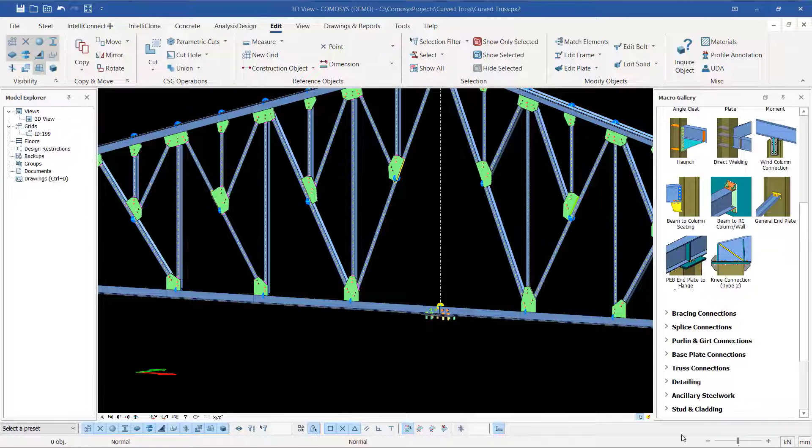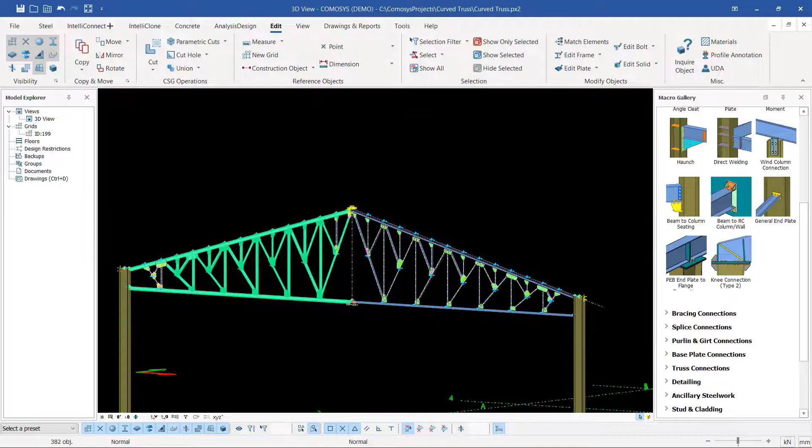Today I'm going to show you how we can create further connections on this particular truss. I'll pick the apex here and show you how we can create a connection, because, as I told you, this will be two assemblies of truss. This will be one assembly, and this will be a second assembly. So this will be carried to site as an assembly, and this one also. But all the assemblies will be assembled at the workshop. So once welded at the workshop, they will be lifted or shipped to site.

Now let me show you how we can create some simple connection at the apex here. This is the two plates I had created. If you take a look at part 4, we had this top chord slightly colliding with this plate, going slightly inward, and this one was slightly going inward too.

So I want to show you how we trim off that, though I had already done it, but I want to show you the best tool that can help you trim it off. In this scenario, the top chord was going inside or colliding with this plate, and this one was colliding with this plate. So to trim it off, just use a fitting tool. Come to Edit, where we get all the best tools that can help us in editing our model.

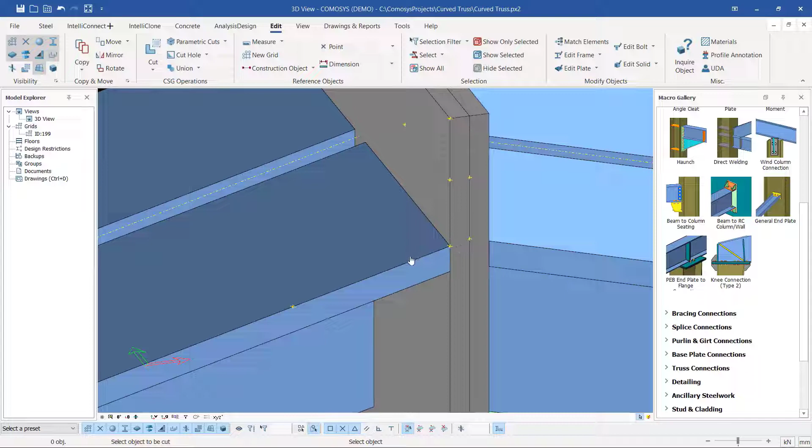Once you click on Edit under the ribbon, come to the drop-down arrow under Cut, click on that, then pick Fitting. You invoke the fitting command, and if you take a look at the bottom end, you'll see 'select object to be cut.' Then pick the object you intend to cut. In our case, it was this top chord getting its way inside the plate. So you select this part, then come back and select the surface you want this part to flush to. Then select the plate right there, and you'll find that member flushing at the surface of that plate. Then do the same thing on the other side. I think you've gotten something there.

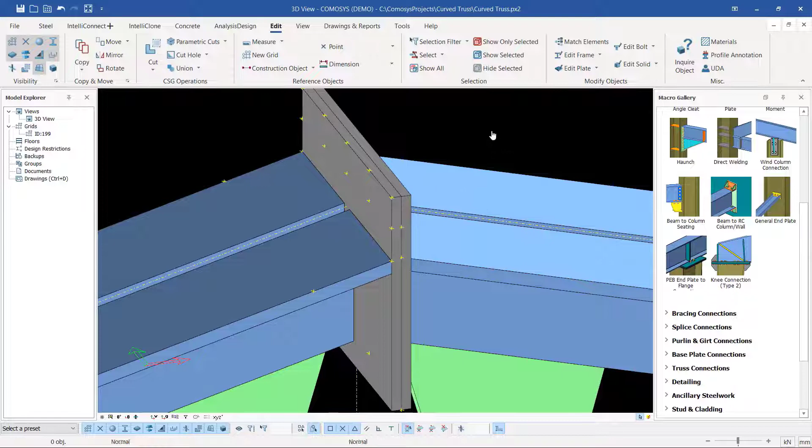Once you've done so, you'll go ahead and weld this top chord to the plate. The welding will be done immediately after we finish the bolt placement on top and the bottom here. So I've already marked the locations of my bolts, which were just created using points.

Let me show you how I created my points. I came to Edit to access the points tool, clicked on Points, and snapped on this end. I created a point there, and a point here. Then I came here and picked on Intersection Points to create the midpoint between these two points. I clicked on that spot and came all the way there to create another point. So between these points, I wanted the midpoint between this point and this point, giving me this point, then this point.

Then I copied these two points at a distance of 20 millimeters. Let me just confirm that - right click and come to Measure, right click and come to Distance. Then I copied these points downward by 20 millimeters.

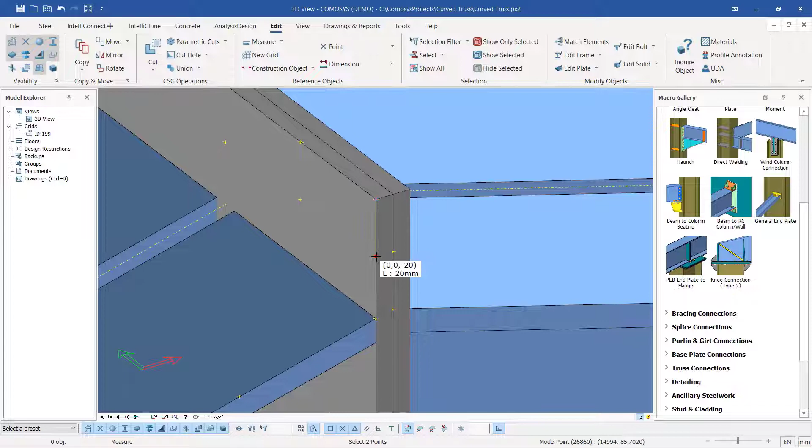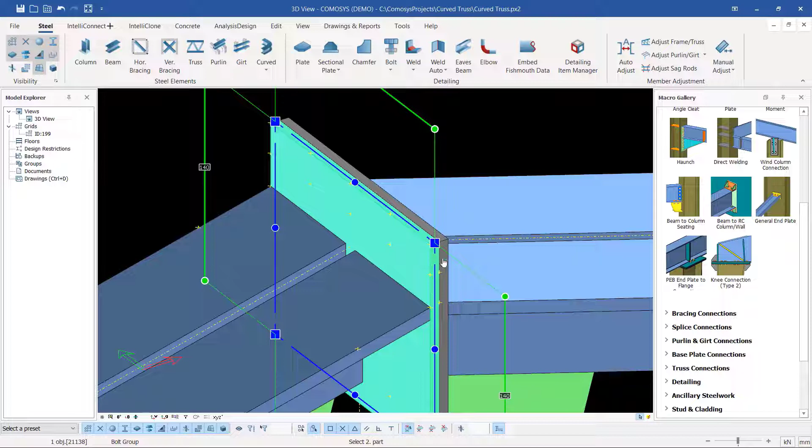Now this one is very simple, and I think you can do that. Let's create the bolts now using these points. I'll come to Steel and pick on Bolt. The moment you invoke the bolt command, if you look at the bottom end, you'll see 'bolt group.' I'll pick the members I want to bolt - this member and that member. Then I right click, and your cursor will change to a plus sign, which means the bolt is active.

Now, if you take a look at the bottom end here, you'll see bolt X direction. I'll snap at the first point here, then move all the way and snap on the second point right there. The moment I snap there, you'll see a warning, which means there's something wrong, and that we need to rectify.

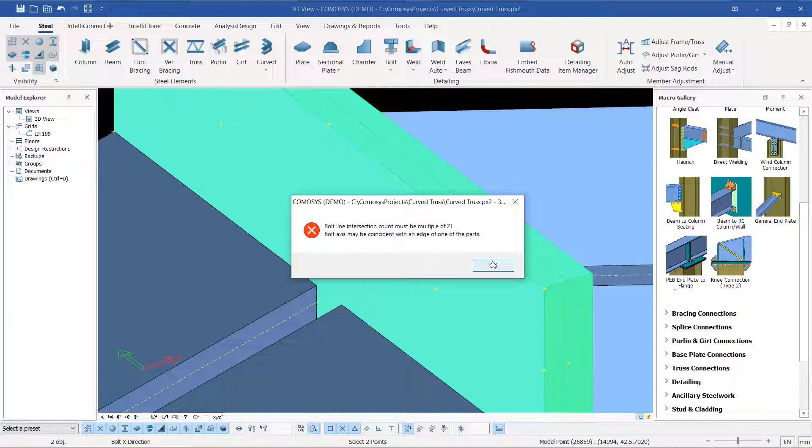What's wrong is the orientation of our XYZ plane, so we have to reorient that. I'll go ahead and close that. Once I've done so, you can see a symbol of bolts already in place, but it's appearing because the orientation of our XYZ plane is not correct, so we have to correct that. I'll delete that for now.

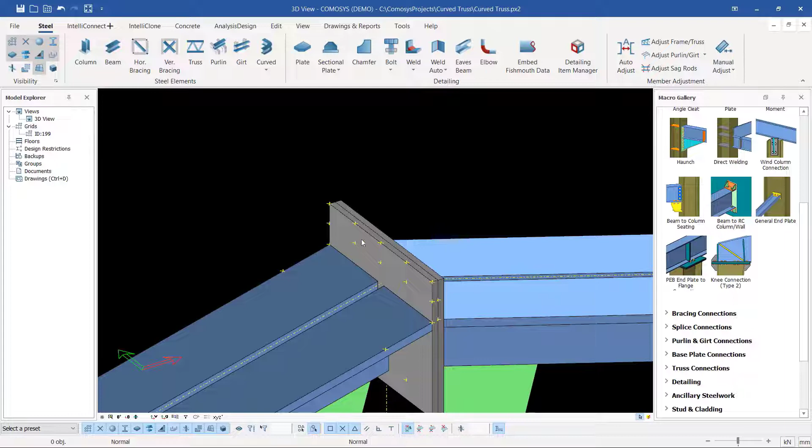As it is now, we want to place our work plane tool on the surface of this particular plate. We'll come to View, then More Options, and click the drop-down arrow. We can add more tools here. We have Onto Object, Onto Surface, but in this case we want to use On Surface. I always find that very easy to access for a beginner.

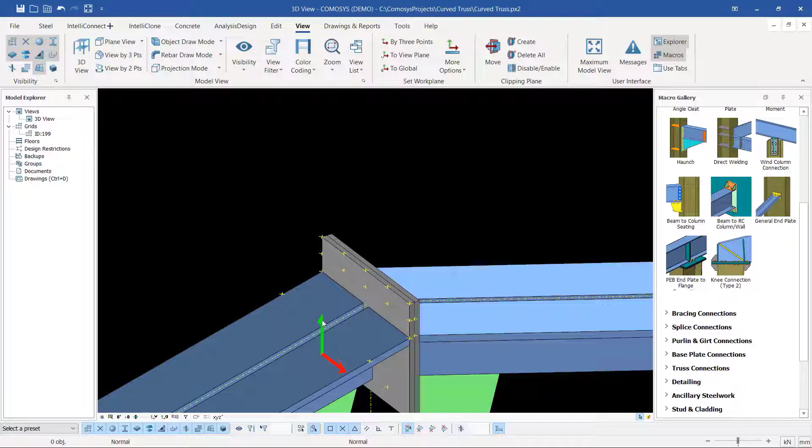Now I'll just place my XYZ plane on that surface right there. You can see my XYZ plane is flush, or laying flat on the surface of this particular plate, meaning it is in line with the surface of this plate.

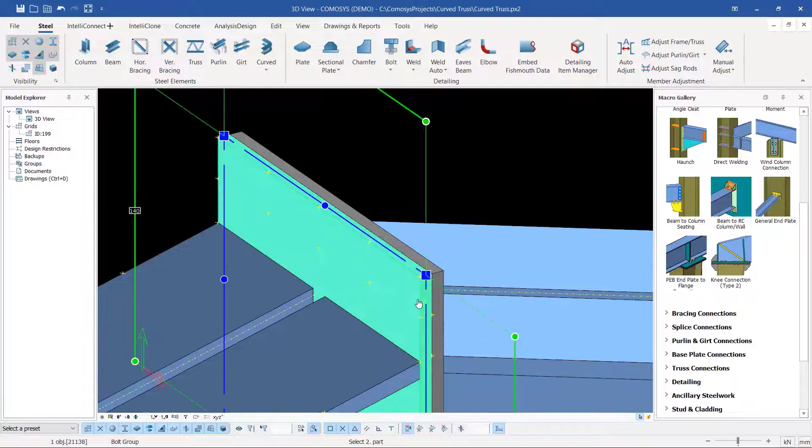Now, if you come to Steel here and invoke the bolt command, we select the parts we want to bolt together. I'll select that member and select this plate, then right click. The moment you right click and see the cursor change to a plus sign, it means it is active, and you start defining the points or location where you want to place the bolts.

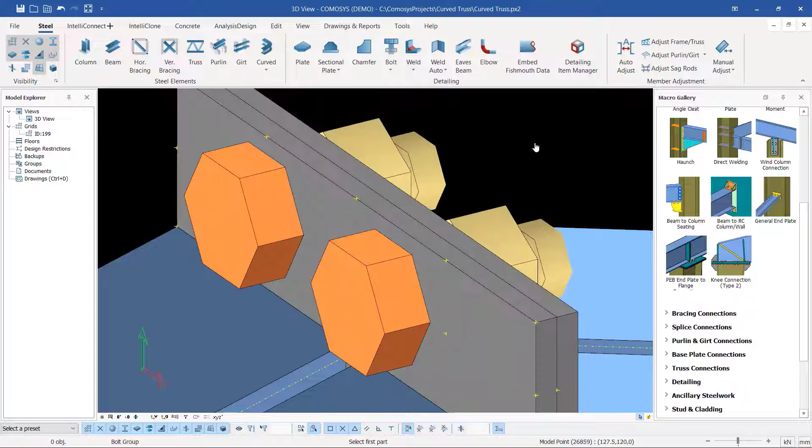I'll snap on that point that I created and snap on these far end points. If I snap there, you'll see I have the bolts in place. So this is what I wanted, but the bolts are not exactly on the location of my points.

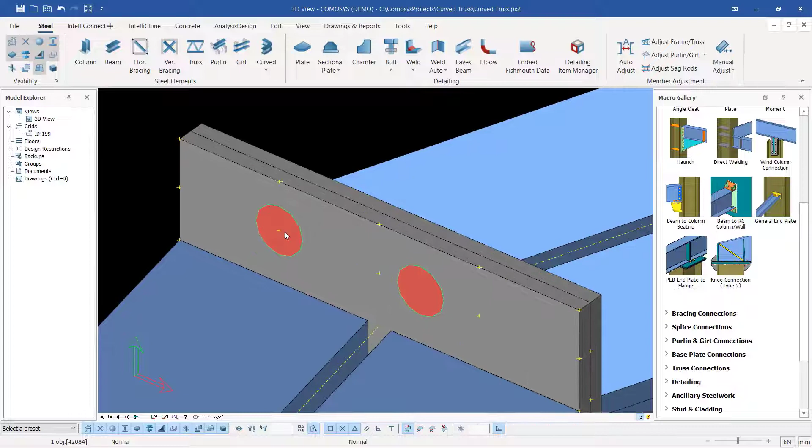To confirm that, always select the bolt, right click, and come to Hide so that you'll be able to see or take a measurement between the bolts. So we have the bolts here. The first one is in the exact point, but this one is way off the point. So how do you correct that?

Just left click, then right click and come to Distance, and confirm this measurement here. Select on that spot and move all the way and confirm this measurement here, because this is the location where we intend to place the bolt.

Then snap there. Prior to snapping, you can see on the screen, 85, comma, at absolute 0 coordinate. The first length you can see is 85 millimeters. So the center to center of this bolt is 85 millimeters.

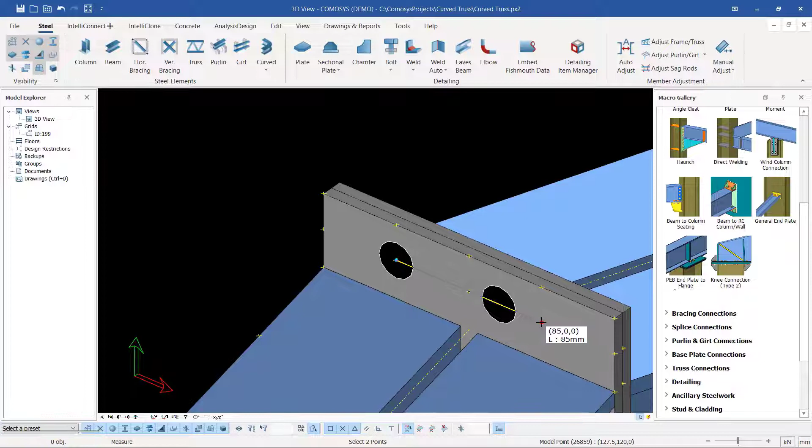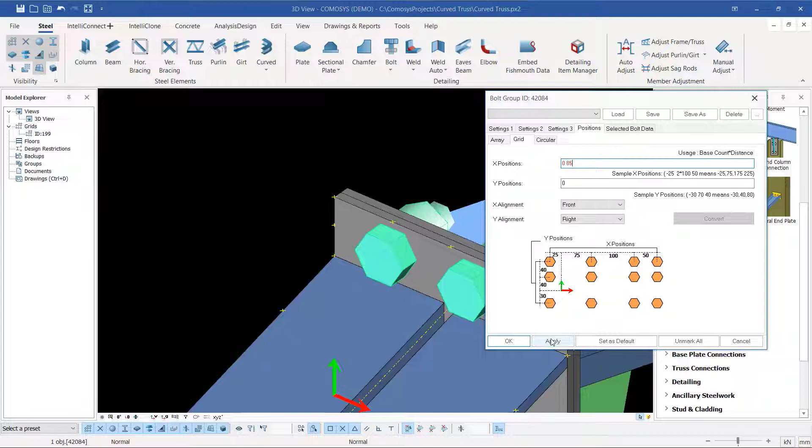Now we'll go back by right clicking and clicking Show All. We double click on the bolt, then come to Positions. Under Positions, on the X positions we have 0 and 60, meaning the distance between the center of the bolts is 60 millimeters. Now we want to change this to 85, so we'll key in 85 there. If you click Apply, you'll see the bolt shift to that position.

To confirm that, just right click and come to Show Only Selected, or Hide/Show in Selected. You can see it is now in the exact position. So right click and Show All. That's how you do it.

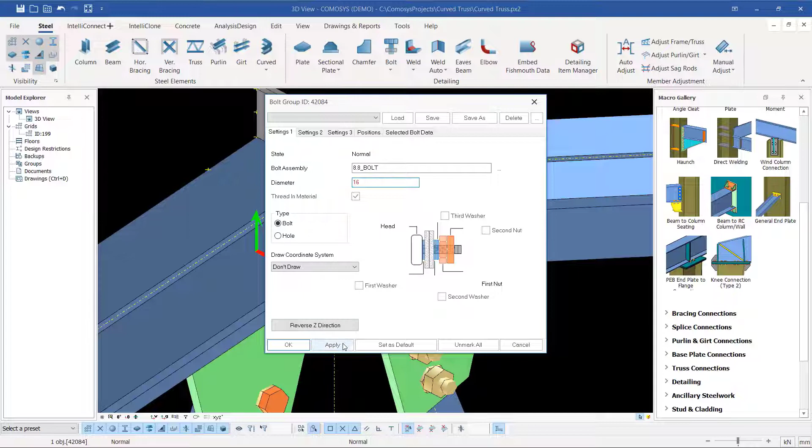Now, the next thing we're going to do is just copy this. First, check the size of the bolt by double clicking on it once again. If you look at the diameter of this bolt, it is 20. M20 is too big for that particular connection, so we change this to 16 millimeter, then apply and give it an OK.

So we'll copy this bolt at the bottom end here, because I had copied the same points at the bottom end here.

Let me show you prior to copying. You can see the bolt here, the point is here and then the point is here. So I can confirm these measurements. Let me turn that around, left click, then right click and pick on make measure distance. I want to confirm this measurement to let you know it's exactly 85.

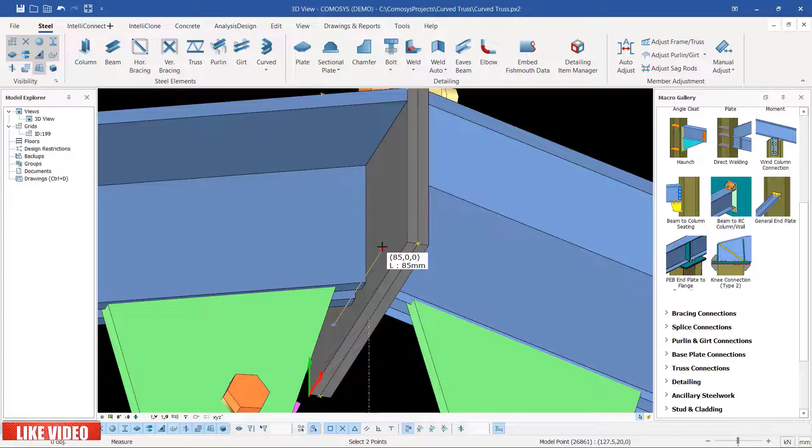Now, if I right click and interrupt that, then pick and select on the bolt, then right click and hold, I'll be able to rotate. So I'll right click here and pick and come to copy, copying at the center of the bolt here.

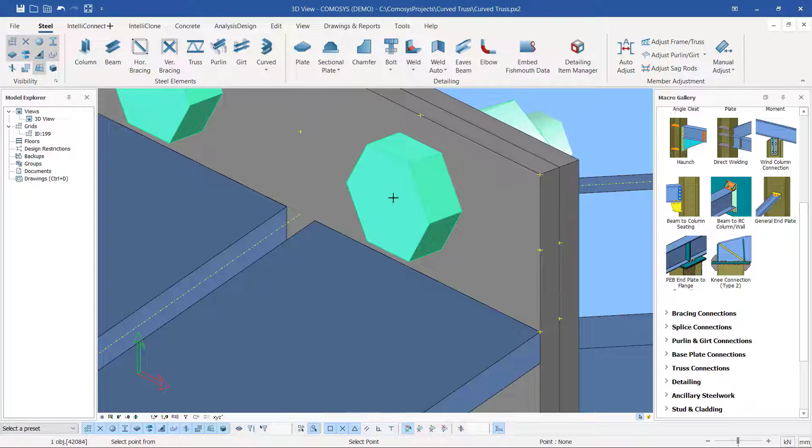So I'll mouse over this bolt so that I get a snapping symbol. The moment the snap is active, I'll be able to snap right on top of that. But if I close this and come there, I'm not able to see that, and I'm not able to actually copy it accurately. So if you find that it's not copying accurately, you just follow the same process of bolt placement.

So I'm going back to bolt here, then select this member and select that plate, and right click and place a bolt from that spot to that spot, and we have a bolt in place.

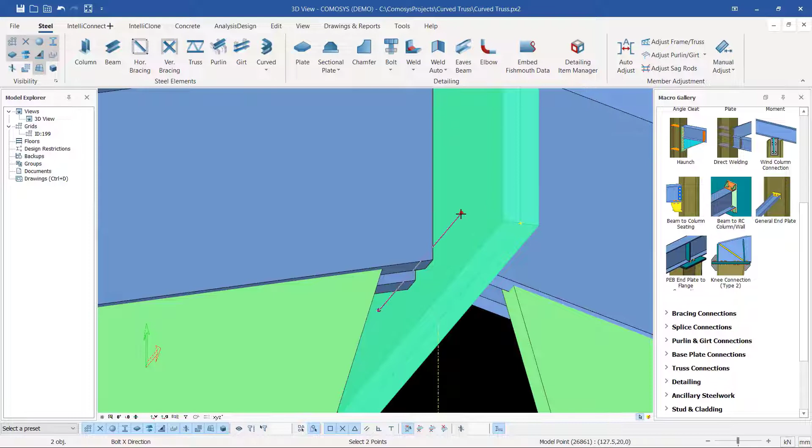So to modify this further, we'll follow the same process. I'll double click on this particular bolt. Since we knew the center to center of each bolt is 85 millimeters, I'll come here and change this to M16, then apply, then come to positions and position the exact positions of the bolts.

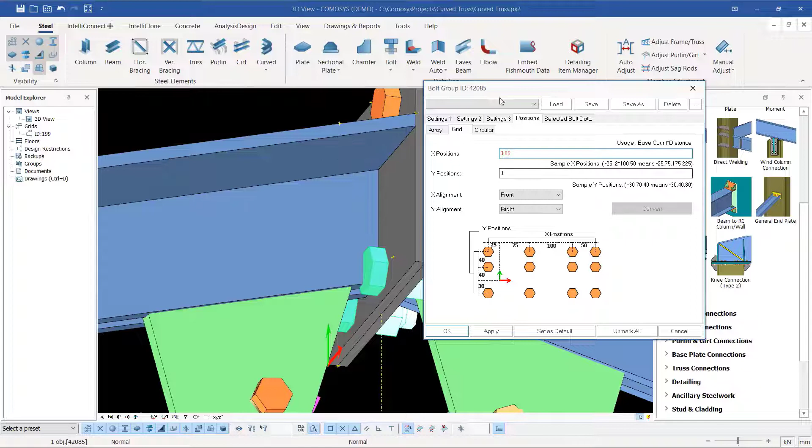So I'll change this to 85 because the upper one is 85. I'll drag this by left clicking and holding, then drag. Then I'll come here and click apply, and you'll see it shifting to the exact positions as the ones up above.

So we've done the connection here. This is bolted to that.

So the next thing we are going to do is create some stiffeners here. Since I had offset this to this, let me confirm that. I'll come to distance, then measure that, and that is 50.

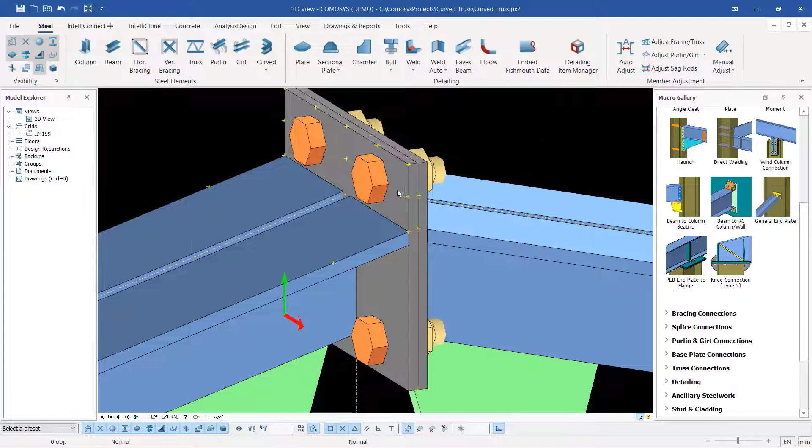So I want to create some stiffeners here. I'll come to plate, then snap on that spot, snap on this spot, snap on that spot, and snap on that spot to create a stiffener.

If I double click on this member, by default the plate will come at 20 millimeters thick. That's too thick, so we want to change that to 10 millimeters. To change the thickness, double click on the stiffener here, then change this to 10 millimeters, then apply.

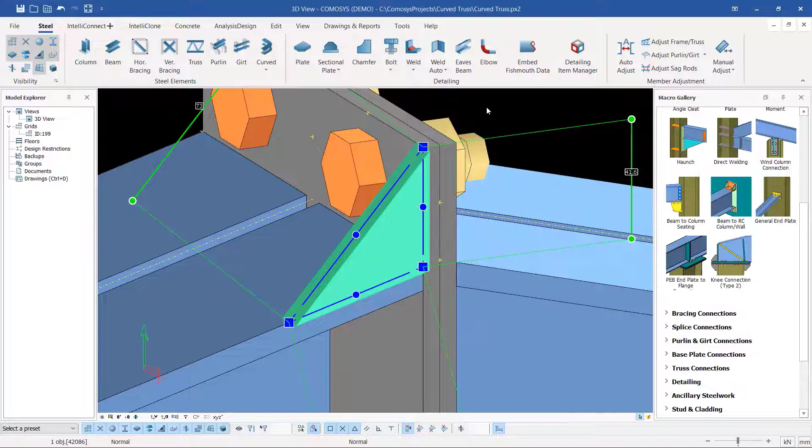Still, if you apply, it's off the point because it is not flush with the edge of this particular member here. Let me turn it around so you can see it clearly. You can see it's not flush properly, so I'll double click on it once again.

I want this edge to flush with the end of this plate. So I'll come to position in depth, click on the drop down arrow there, then click behind or front, just to play with the two options. Let me try behind, or let me try front.

The reason it cannot apply, let's check the general position. The reason is because the orientation of our XYZ plane is not in the correct position. So we'll take it back to its global position by coming to view, then clicking global position.

If you come here and double click, we can go back and change this to give it front, and it has moved to its position. You can see it's flush with the edge of this particular plate.

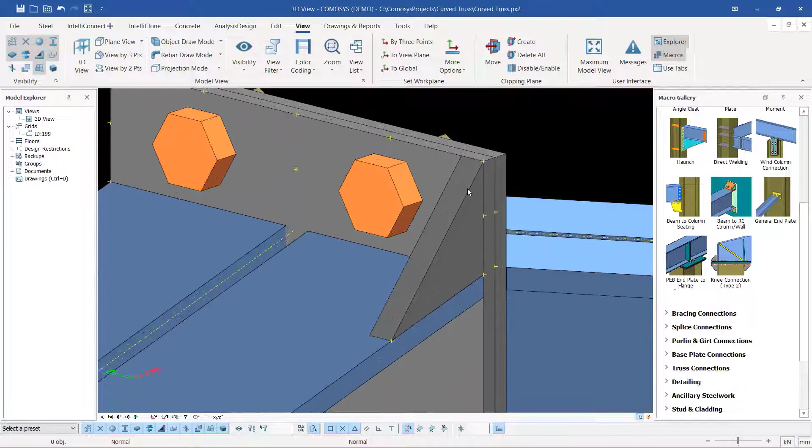So we can go ahead and copy it. Right click and come to copy, then we can copy this one by one. We'll place one in the middle here and another one right here, but on the other end it will not go with the middle selection.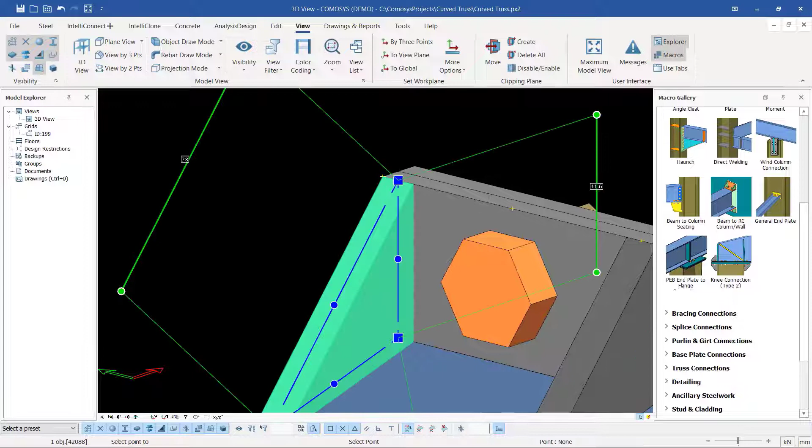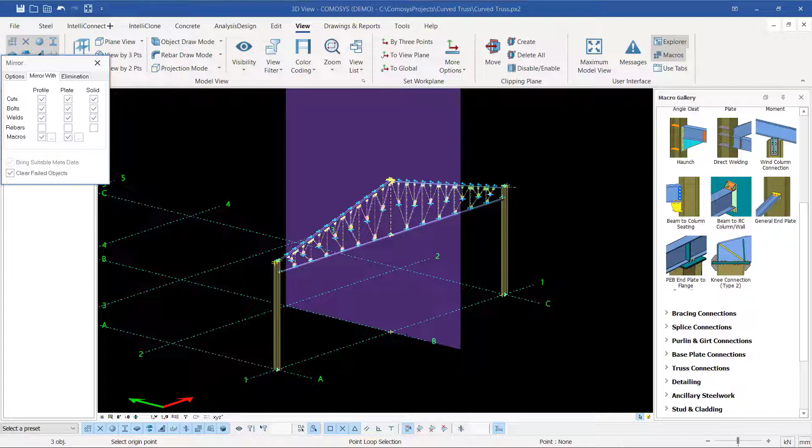We'll select on the opposite direction of this edge, then snap here. So we have that in place. Now we want to mirror this to the other end. Select that, right click, come to special copy, and select mirror, not linear. The moment I click mirror, I'll have my mirror line in place, and it will be the center of this particular span of my truss. I'll snap here, snap right there, and snap right there, so that will be my mirror.

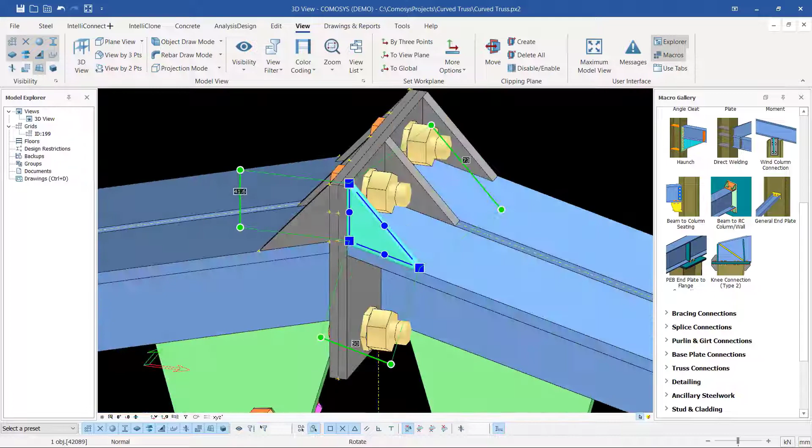Once I've defined my mirror point, I'll come to options here and give it an OK to run that command. If I bring it closer, right click and close this, I'll be able to see I have my stiffeners on this far end.

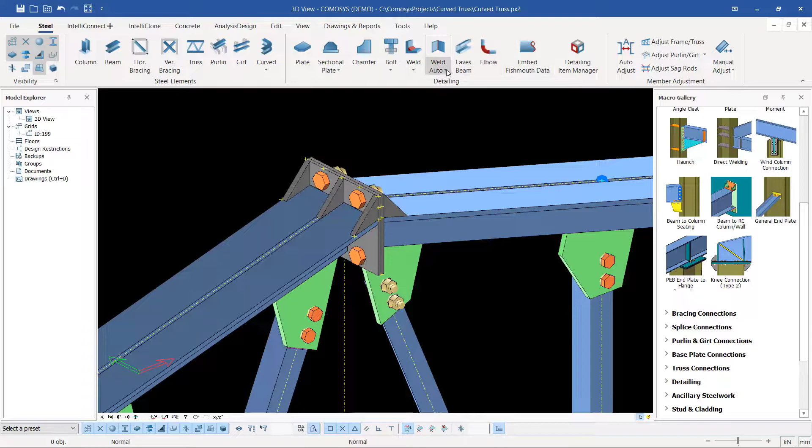Perfectly done. Now I want to create welding. I want to weld this plate to the top chord and stiffeners to top chord. What I'm going to do is go to edit, or steel, come to steel, then under steel come to weld auto, then pick on two objects. I want to weld this plate to the top chord.

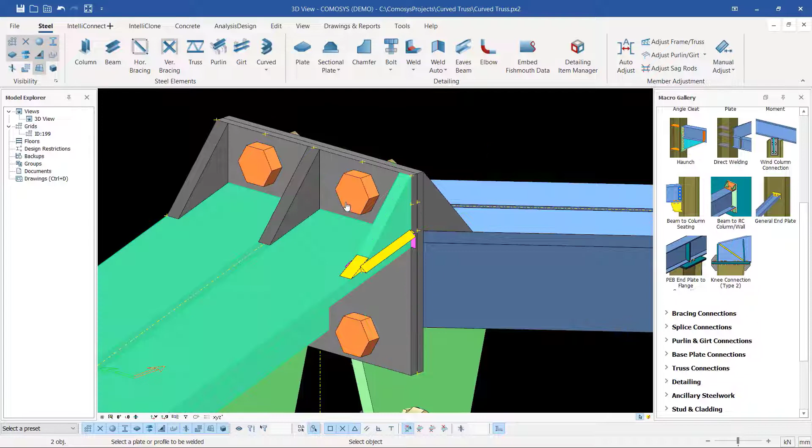If I turn this round, I'll be able to see I have my welding already in place. Then I'll go ahead and do the welding once again. I'll weld that to that, this to this, this to that, that to that, this to that. Then I'll weld this plate to that.

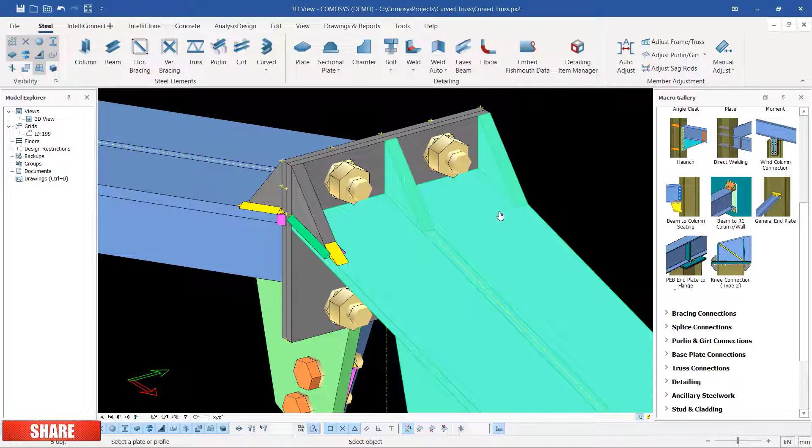Let me just turn that round so that we see it clearly. I'm welding this member to this member, and this member, right click. Then again I'll weld this member to this member, weld this member to this member, weld that member to this member.

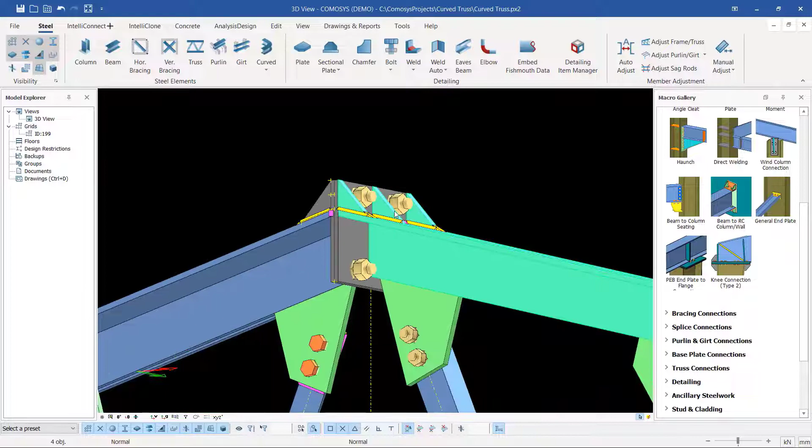So to confirm the welding has been done properly, we'll select this member, right click and come to assembly. We'll select that member, right click and come to assembly. Here we select assembly, and we can see the top chord and the stiffeners have been selected, but the plate has been left out. So what are we going to do?

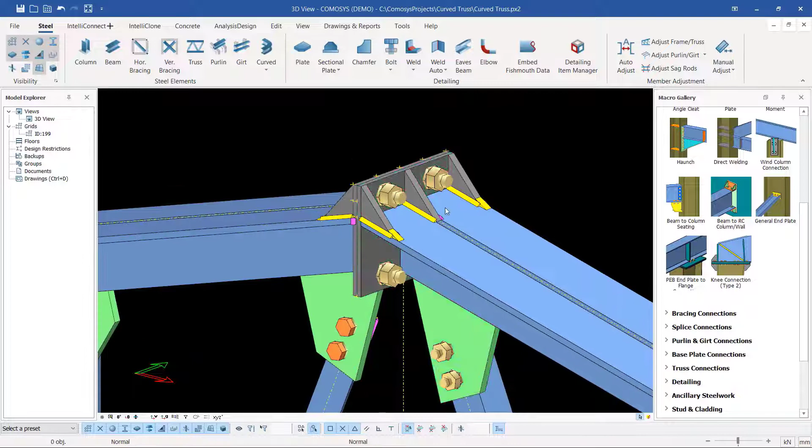I'm going to deselect that and initiate welding once again. I'm going to select on that member, then select this plate and weld it to that plate until we see the symbol of welding. Only then will we be satisfied that the welding has been created. So let me make sure the welding has been created.

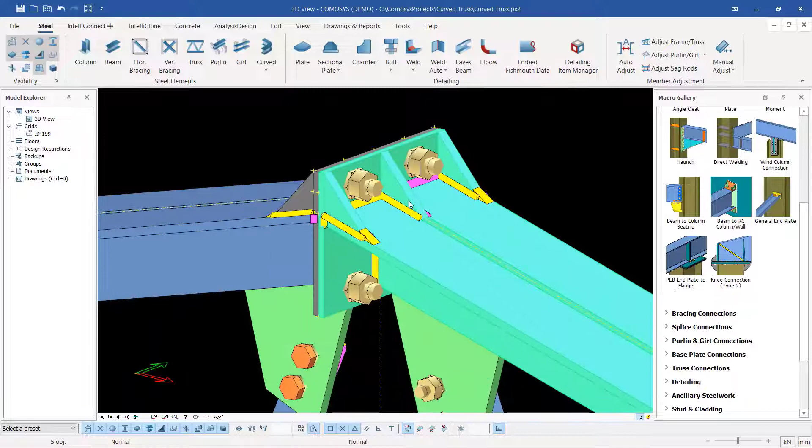I'll come to that spot, select that member - it's not accurate. Let me come to welding there, select that member, then come and weld it on that spot. You can see the welding has been created. If I come here and select that member, right click and come to assembly, we can see that this top chord has been welded to that end plate and the stiffeners.

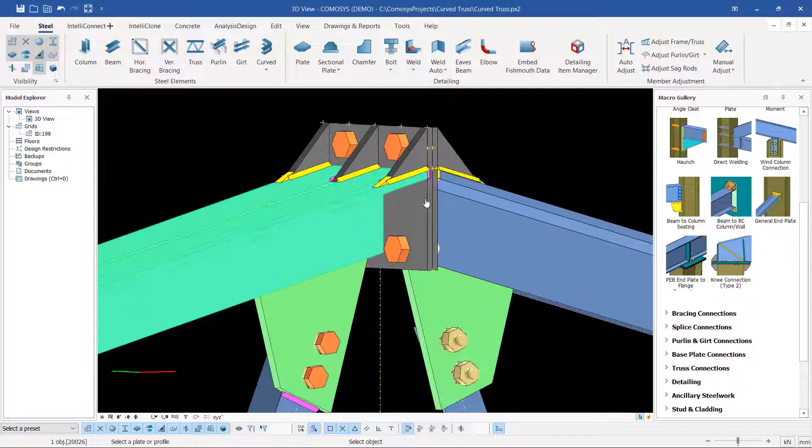Now we can do the same thing on this far end. I'll come to auto weld, then pick on this member. I'm not picking the top chord - that's the reason why. So if I select on that member, I want to weld it to that plate right there. If I come here and select any part of this, then select assembly, you'll be able to see I have this assembly in place.

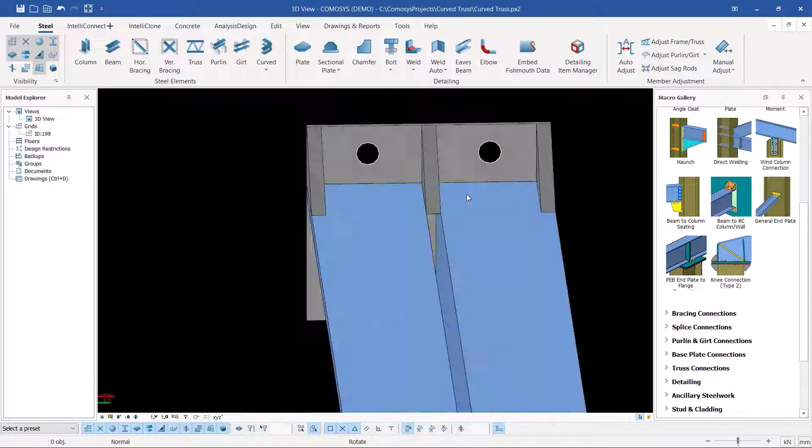So if I select assembly right there, select assembly, then show only selected, you'll be able to see I have these in place. I have that top chord already welded, and we can connect that to the other end. That's how you do that.

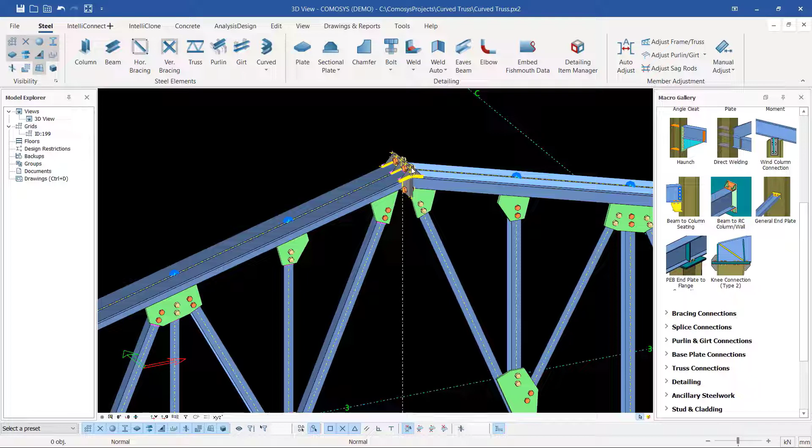Right click and come to show all, and let's meet on the next part where I'll show you how we can connect the truss to the column like we do on the portal frame. So we'll create a connection between the truss and the main column. As you can see here at the far end, we don't have a connection here, so I'm going to show you how we can create the connection.